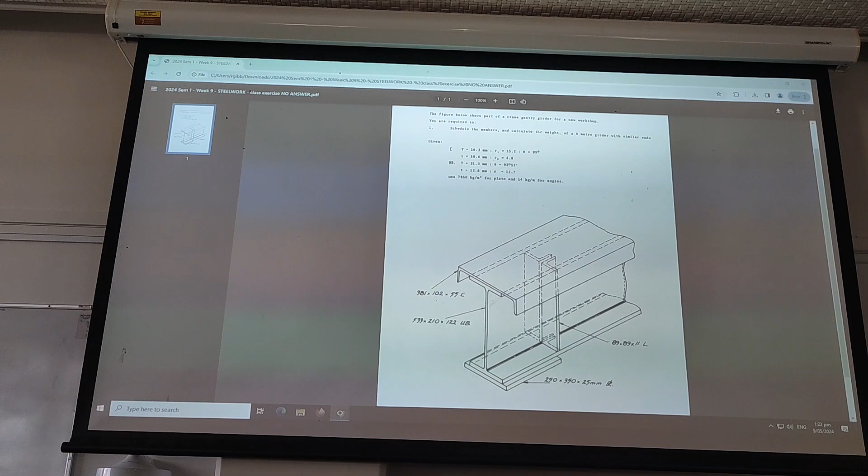So this is what we would call a girder. It would run the full length of a building. So see how this looks like a wavy line here? That's the way of showing that it continues.

Okay? So in actual fact, the girder, or as I say it from the southern part of New Zealand, a girder. I think they also say it in the northern part of China, is that right? They roll their R's? Maybe not. Okay, yeah. Is that correct? Yeah, yeah. Well, I come from Dunedin, but my relatives come from way down by Gore, which is where they really roll their R's. Anyway, I digress.

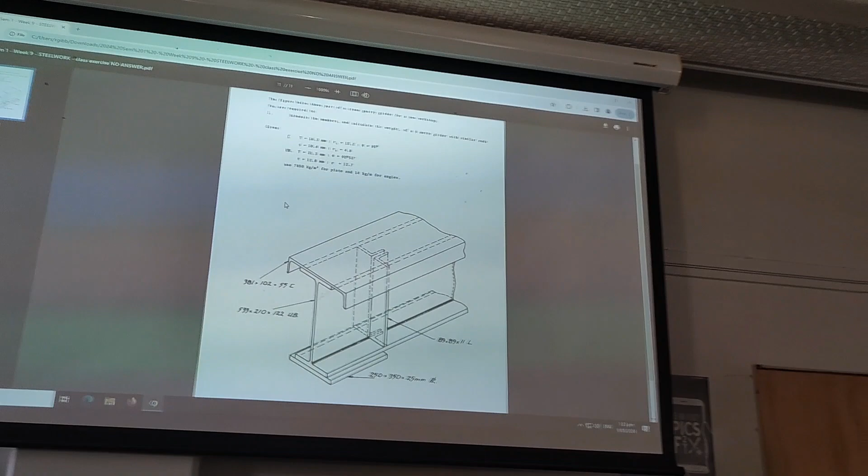This is called a girder. It says up there at the top, it's 6 metres long. So probably roughly from about here to the other end of the room. Now, if any of you have ever driven your car into a garage to be fixed, you would notice that they have those big chains hanging down. If you're a fan of Fast and Furious, they're always hauling the engines up and playing with them.

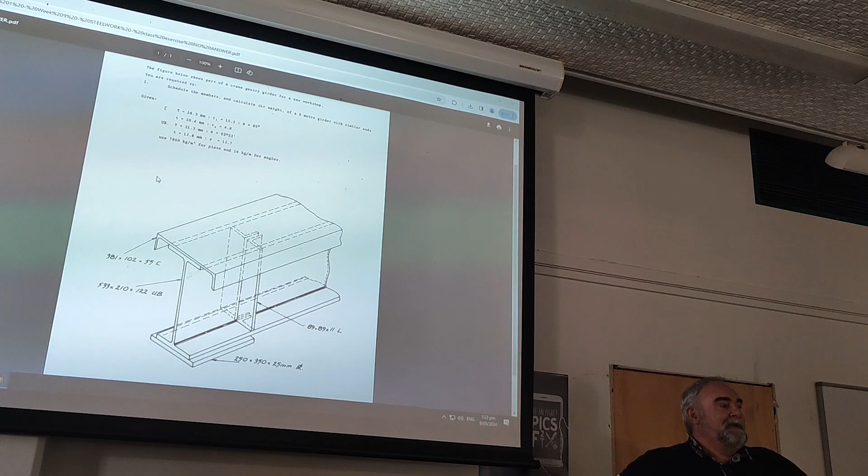Okay, so where a girder would be put in place in a garage, you'll notice that it's not just a beam, but it's also a channel as well, and at each end it's strengthened with this setup, which means it can take more weight, basically. So you can't just hang those chains from an ordinary ceiling like your living room at home, because it would all come caving down. A car engine is probably about a tonne, maybe 2 tonnes, it's quite a bit of weight involved.

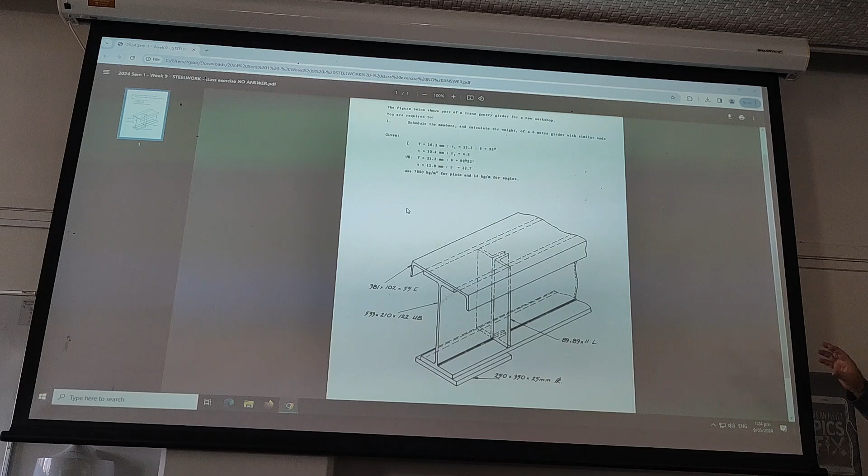So there's 2 reasons why I'm going over this today. The first one is pretty obvious. You've got beams and, well, actually there isn't a column here. I said there was a column, but we calculate columns the same way we calculate beams. So I'm showing you how to schedule steelwork. It's not that bad. It's reasonably easy, but there are a few steps you need to follow so that when you do it in the assignment, you get full marks. All right. So that's the first reason.

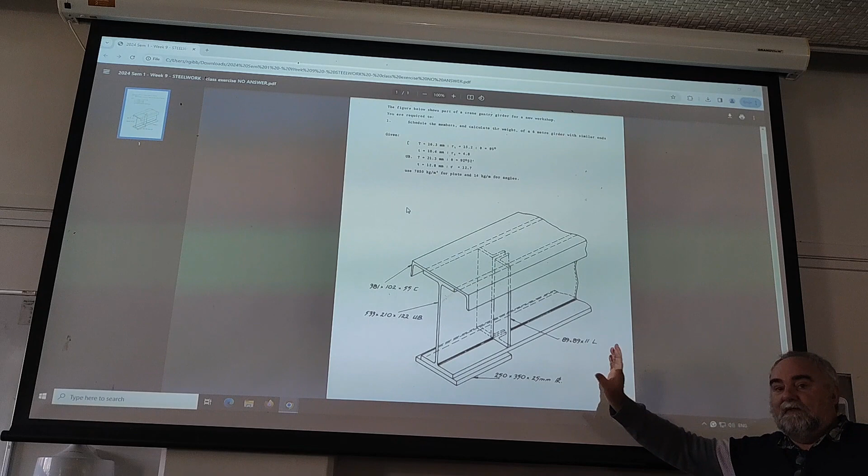The second reason is that little fella there's in the test. So I'll be jiggling with some of the numbers down here. But the concept that we go through today is the exact concept for working it out for the test.

Alright? The reason for that is we all know there's the hey bro effect at Unitec, where it's like, hey bro, I haven't done my homework, what did you get for this? And you copy it down and you get 100%. There's actually something around at Unitec now that's not hey bro anymore, it's called AI. But anyway, there's that way of doing things, and then there's the way where you all have a go at it, have a good argument or conference about it, and everybody learns how to do it. Now that second way works perfectly, because you get good marks in the test because you understand it, and you also get good marks in the assignment. So this is my way of getting the hey bros, because they might be given an answer in the assignment by their friends, but when it comes to sitting the test, they won't know what's going on.

Now, having said all that, there's a handful of you in here today. I'm guaranteeing 90% of you are going to understand this, and you're going to end up doing well in the test and in this part of the assignment. This is mostly scheduling on the assignment, okay?

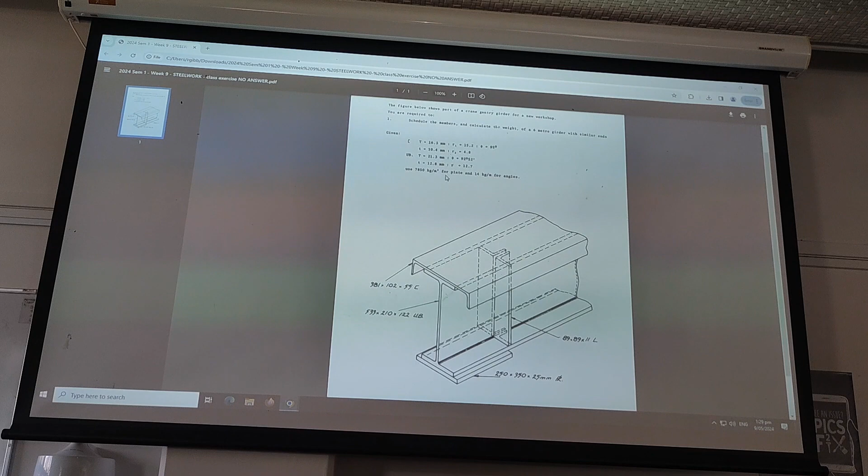Now, if you haven't realised already, the call-up is the old call-up, so we're going to convert that into the new one. Yeah. With the angle up here, it says use 7850 kilograms per metre cubed. So in other words, they're pretty much babysitting you for this one. They're saying that for the plate, use 7850 as the metres cubed for the weight, and they're actually telling you that it's 14 kilograms per metre for the angles.

Now, you're not going to be told that for the assignment. You're going to have to use the 7850 to work out the angle weight. So just digesting that, somewhere in the notes that were handed out today, I think there might have been an example of 7860. I'd like you in the assignment to use 7850, please, for your plates, because my calculations come off 7850.

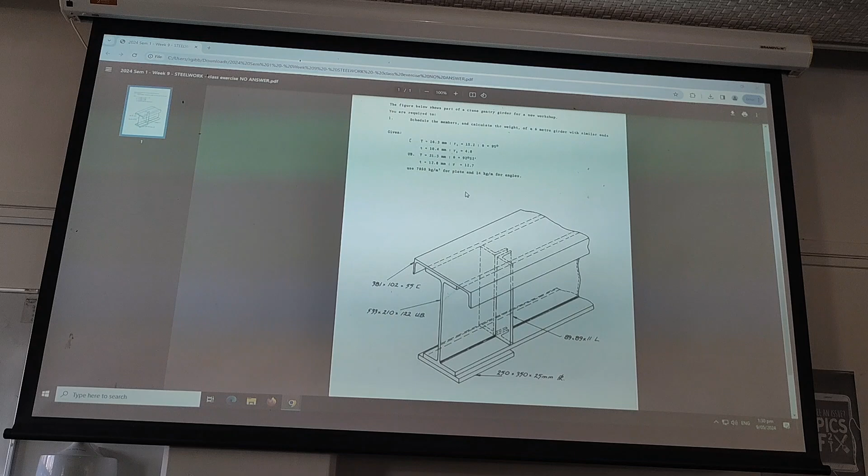Now, a plate is extremely easy to calculate. It's the width by the length by the height, or the thickness. Gives you the cubic metres, and if you multiply it by 7850, you'll end up with kilograms per metre, or the overall kilograms here.

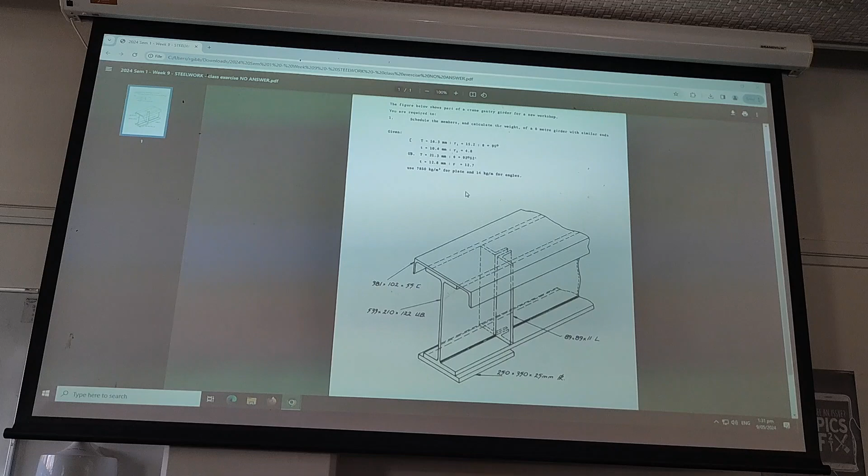Because we're dealing in kilograms and metres, we should schedule everything in metres. So please don't give me your schedule in millimetres, or you won't be getting it marked. So it needs to be in metres. Sure, you can work it out in millimetres originally, but make sure you give the answer in metres. We actually have all the information we need. I need to do a bit of a chart up now on the board and take you through the wonderful world of scheduling steel.

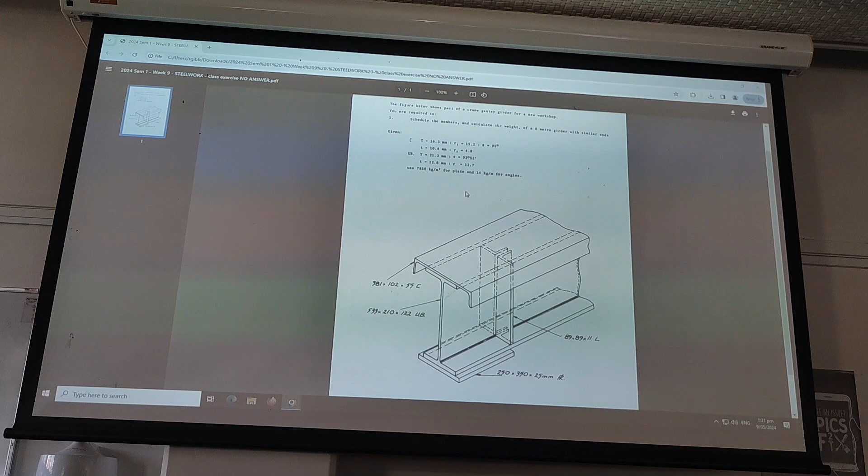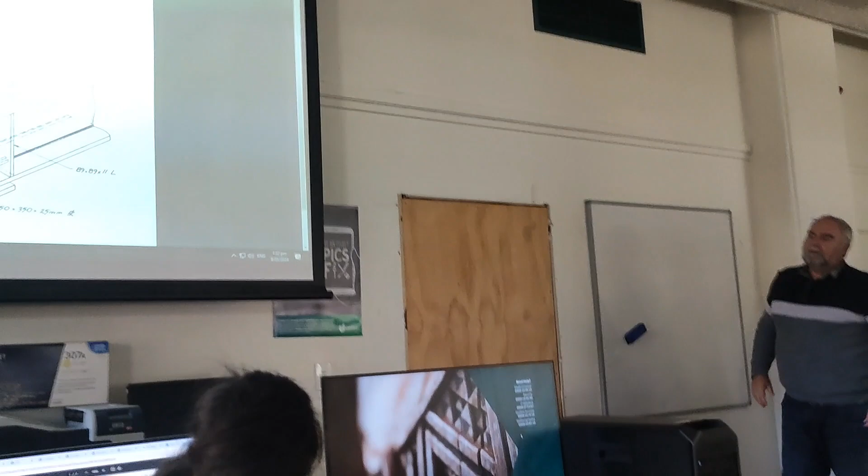What, can they do it here? This one? The big one. I'll do the actual main schedule here, the answer. But if I'm doing any work, we can sort of do it from over there. That's why it's better to film this class, because I tend to go from whiteboard to whiteboard to pointing at something on the monitor. If we just film what I put up on the screen, it's not so good. I have a way of doing it online which is a little bit better, but I'm not allowed to do that at the moment. We have to teach face to face.

Okay. Guess what? It's gone. Yep. I just decided, don't like the input not found. Check the cable. I don't think it's anything to do with the cable. I think it's just done a reboot. Thank you very much. Okay.

So we have the member as it is called up under the new school way of doing it. Unfortunately, I had everything on the screen there, but we'll get around it. It was the number of, kind of weird, isn't it? The number of. The length.

Now we're going to move on to the angle. No, we're not. We'll do the plate. Okay. Now, the plate is often scheduled wrong by students. What have we got here? So the plate is 250 by 350 by 25, and the immediate thing that you want to do is go 250 by 350 by 25 over here for the thickness. And that's the quickest way to get that wrong. First of all, 250 and the 350 around the wrong way.

Because we call them up. The old way was to call it up by 250 by 350 by 25, so we called it up the old way, which was the width by the length. The new way is to call it up as the same thing, 250 by 350 by 25, and we go PL. Some people put a P with an L through it like that. I prefer just the letters PL.

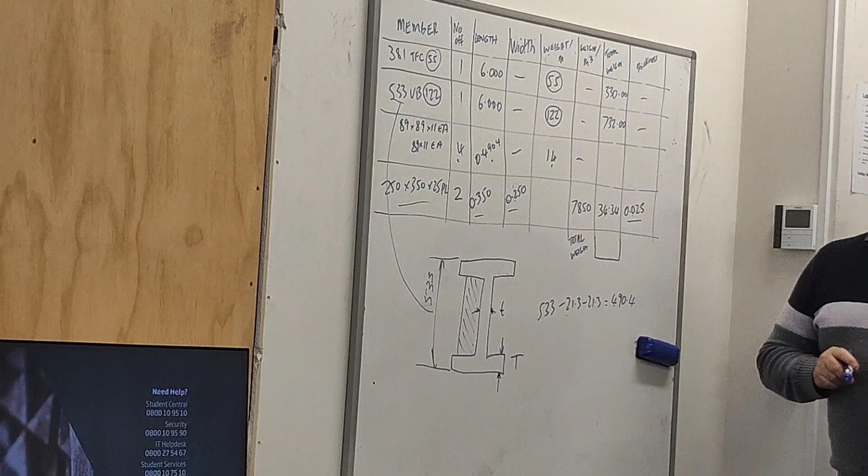So how do we call up the angle? The angle is called up as 89 by 89 by 11 EA, or it can also be 89 by 11 EA. And we multiply that by that by that, we get 27.46. And a total weight of 1123.80 kilograms.

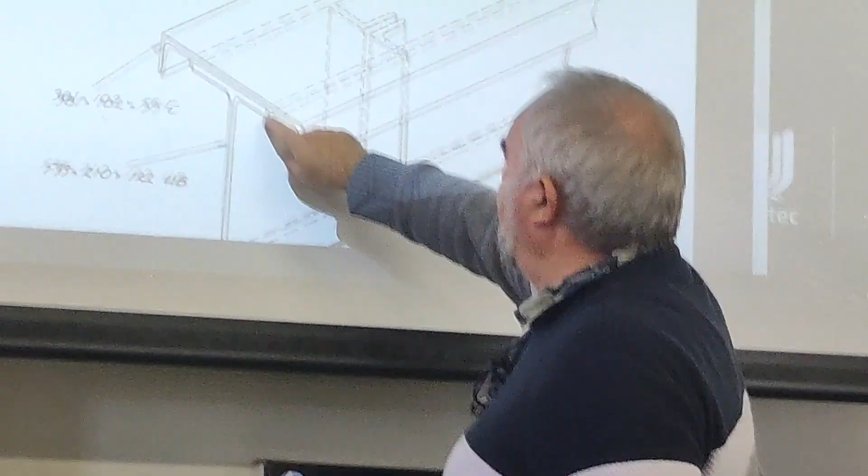There we are. But there is one more thing that the client has asked us to calculate, and that is whether or not the angle sticks out past this point here, so whether it's going to jut out past there for when the crane's coming along. How close is that? Is it going to go over the edge, or is it going to be okay? So it's an 89 angle. The client's asked us, if that's 89,

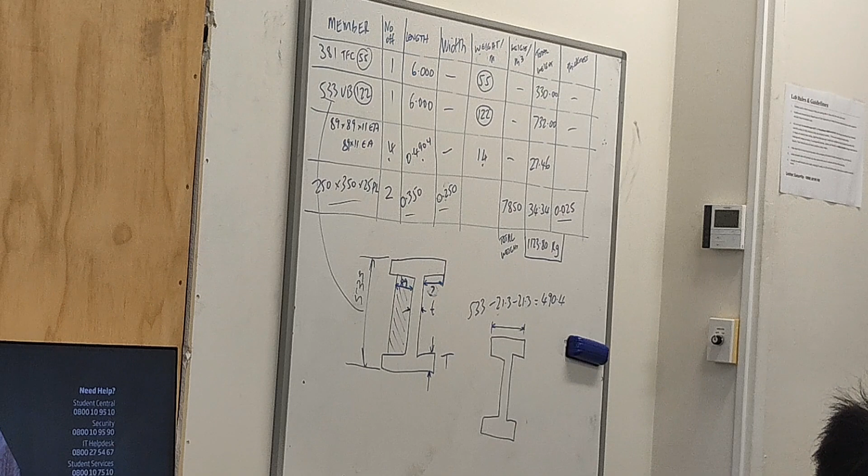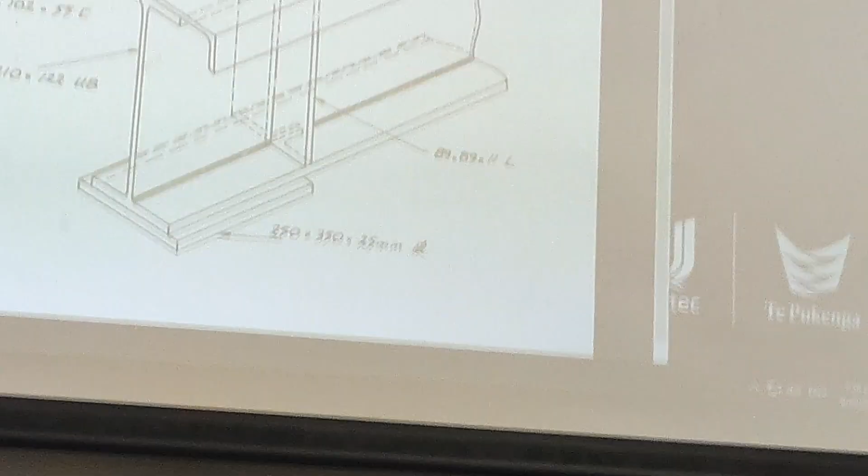what is that? Question mark. To calculate that, we use little t. So the width is going to be equal to the old. I'm pretty sure you've got to use the old call up to find the width. It's 210. See here on the old call up, it's 533 by 210 by 122. You don't get that on the new call up. So it's 210.

So it's 210 minus t, which is 12.8. I did that wrong last semester. And then you've got to divide that by 2 to get that number. When you take away the 12.8 and divide it by 2, you end up with 98.6. And we know that that is 89, so therefore that is 98.6. So we can say to the client, no, it's contained within that beam. And that is how you schedule steel.

Now you have got a problem with the assignment because you've got an angle that looks a bit like that, which your purlin sits on. I've given you 3 members, and one of them is the angle. We know the weight is 7850. And I've given you the CAD drawing of the angle. Any ideas on how we can work out the total weight? That's 7850 per metre cubed. We know the width is 100, isn't it? Has anybody got the assignment? I think it's 100.

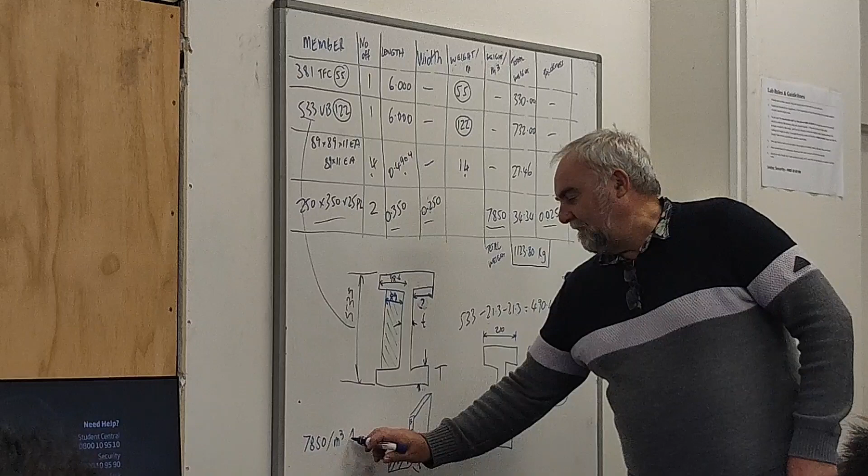I think what I would do would be to make that a P line, list it, it gives you the area, times the 200, and you're pretty much there, aren't you? There was a time when the teacher didn't work things out, but there we are. I'm not giving you the answer. Make sure your zeros and your points are all in the right place. Okay. That's how you do your angle. Alright? Everything else you should be able to do off this with the assignment.

I don't see so many stunned mullets this time. I think most of you understood most of that, especially the first part. So what I'll be doing in the test is I'll change those numbers around. There'll be different numbers, different lengths, different calculations, but you'll only get one of those calculations to do in the test, with an A, B, C, D sort of thing, or maybe a straight answer.

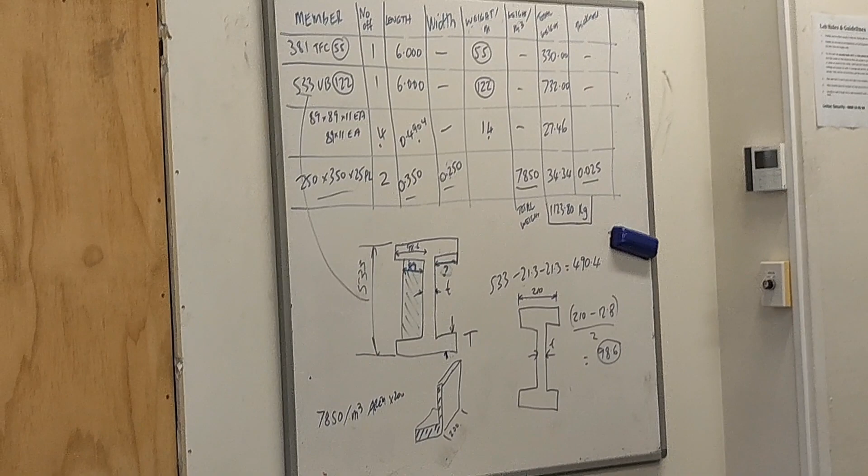And it's the channel one. You know how there's a channel there that I gave you the model answer to on schedule? So that's the drawing that you would do for the channel if you were asked to do the plan view. Some students have had a look at the channel reinforcing and the example answer. The reason why I gave you that channel and I didn't go over it in class is that it has a lot of things that we don't need for our assignment. It's sort of like me giving you a present to use in the future, because there are all sorts of things in there. We have to change the centres at one stage.

They've given a distance to the reinforcing bar, whereas we don't give the distance in the assignment. You've got to work that out. What else is there? Oh, I think there's a limit on how long the bars can be, and working out where the overlap is. There's a lot of things in that drawing that is extra learning. So don't get too worried if it's a little bit complicated. The one that I